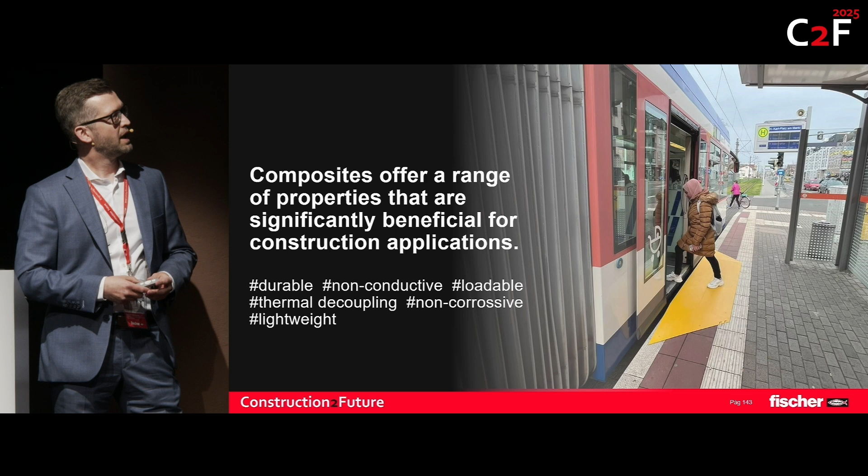Let's start with why. Why composites in the construction business? Composites offer a wide range of material properties that are quite useful for construction applications. All our products are developed combining a bunch of requirements. Material properties of composites are fitting quite well. When we look at this picture, for example, and I've just mentioned here a few properties of composites, we see this barrier-free ramp made of a vinyl ester glass fiber composite system, enabling wheelchair drivers or other persons with restricted mobility to enter and exit trains quite smoothly and comfortably.

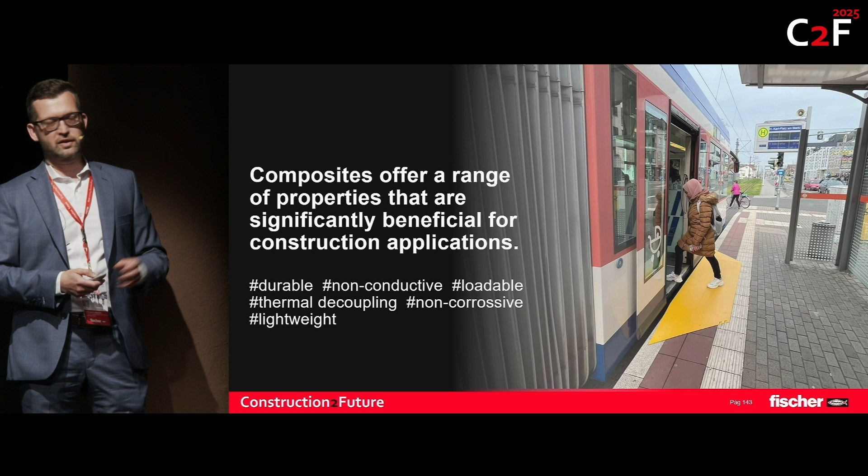Of course, thermal decoupling, for example, is another big advantage of composites compared to other materials in the construction business, like steel or aluminum, which we use for applications in the building envelope when it's about an energy-efficient way of building, which is not the case in this example. However, I would like to ask you to keep this picture in mind because I will return to it later on.

Let's continue with the question, what? What do we do in FISCO? As said, it's about profiles, and that's the typical process of our value chain, which almost every product goes through. We start with the idea, we bring it through the development process, we industrialize the product, we bring it to life, we materialize it, we have our own production, everything is located at one site in Germany, and we bring it to our customer, and of course we also support our customers with assembly support on the construction site.

But it's not about material only. The material is just a means to an end. And that's one crucial criterion with regards to the positioning of FISCO. We always think in systems and we think in solutions. So what does the customer benefit from? One example, you see it on the very right-hand side, the black frame. That's a window installation system which we have invented, also with some items that are patent pending at the moment. It's made of glass fiber profiles, but it's not about the profiles, it's about the solution. We save installation costs up to 75% in comparison to other similar solutions. So that's the way we provide a customer solution, and that's our understanding of an engineering accomplishment.

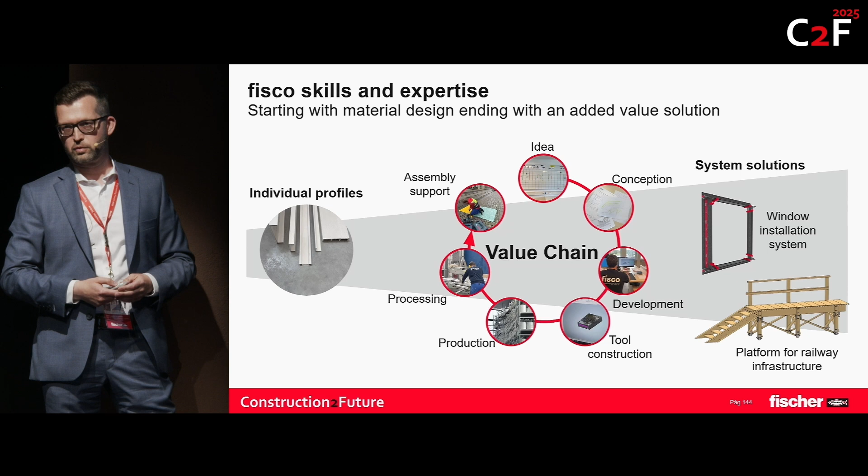Another example, and I will show this in detail later, is this platform for the railway infrastructure. So one part of the positioning of FISCO was solution orientation and a very strong application focus, being very close to the customer and being driven very technically. And then we dedicated ourselves to another very crucial issue of composites, because composites, also glass fiber reinforced polymers, GFRP, do inherently burn because they are made of a fiber component like glass fibers, carbon fibers, other fibers, and a resin, a matrix system, and this is organic chemistry.

So we said, why not develop an inorganic composite material? And we found out it's rather difficult. A lot of other companies tried to do so. Unfortunately, they failed. GFRP burns, ours does not. So finally, we succeeded in this development, and since this was a rather new material to the market, we decided to give it a name, and we call it FiResist, Fi for fibers, and the word fire resistant is inside this term. And I said to you, please keep in mind the picture I've shown you before to illustrate what composites in construction are good for.

So you see here, this is not on the outside, as shown on the picture before. That's inside a metro tunnel, the metro of the city of Munich. And there you have very strict fire requirements. No combustible, no flammable material is allowed to be installed in this tunnel. They even think about changing the timetables from a paper print to an incombustible version. That's how strict they are. And we also installed our access ramps for the wheelchair drivers here, because they are made of our incombustible composite material.

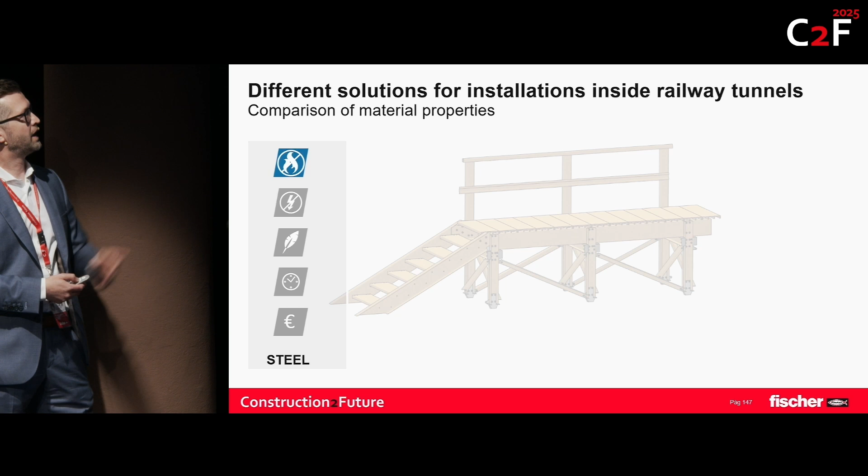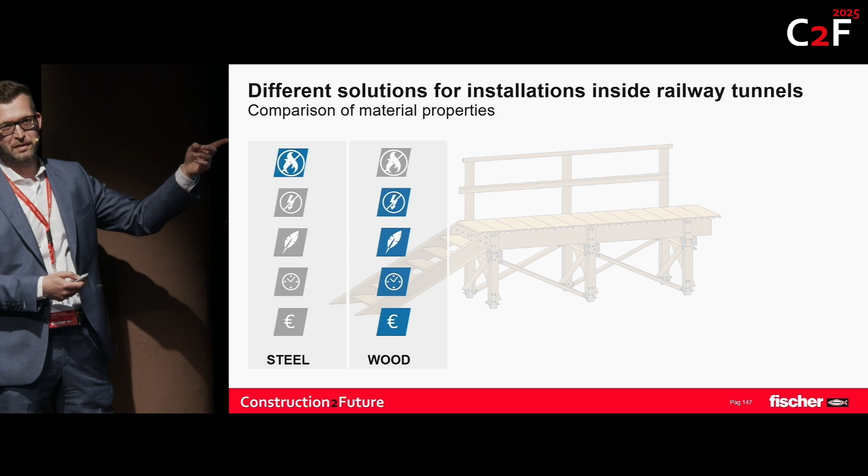And if we compare the typical materials used for such kind of installation with the criteria flammability, electrically non-conductive, lightweight, time for the installation, and in the end, what's the total cost of ownership? You see, steel, incombustible, but the other criteria are not fulfilled that well. With wood, as shown on the picture before, I think it was installed in the 1950s. Everything works out well, electrically non-conductive, easy to install, so it goes fast, and it's not too expensive, but unfortunately flammable.

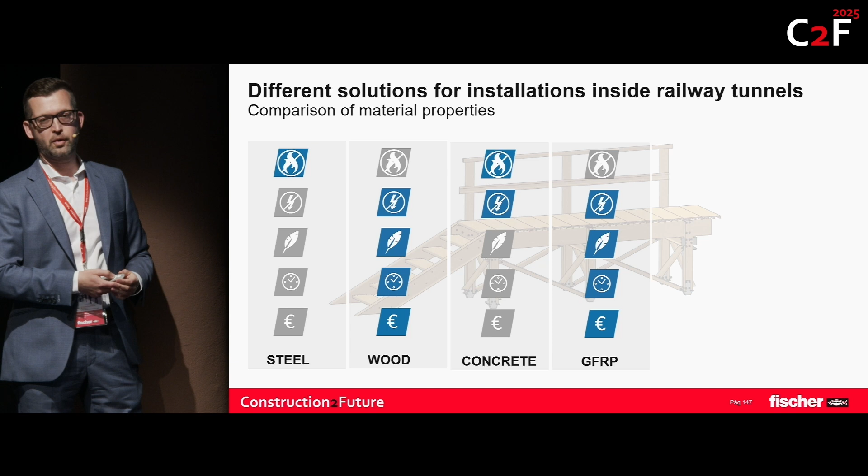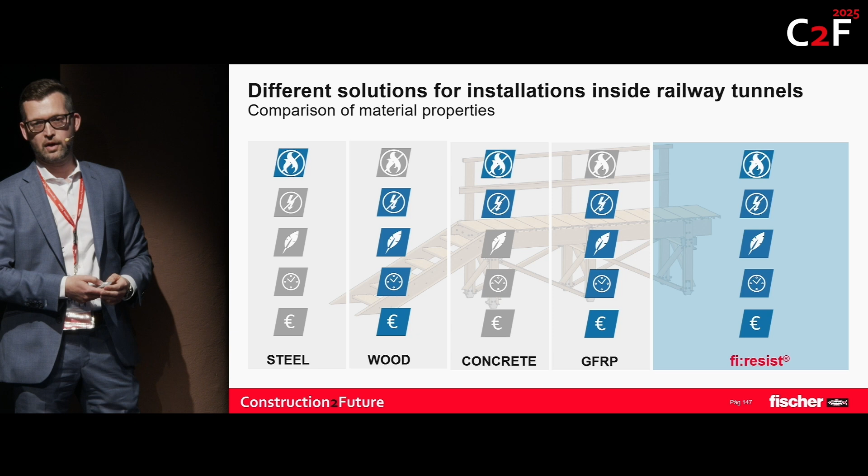Concrete, not flammable, electrically non-conductive, but definitely not lightweight. So it takes a long time to install, because you need to bring down all the material there, no matter whether it's concrete to be mixed on the construction site, or it's prefabricated concrete blocks. Takes a lot of time, needs heavy tools, heavy machinery, so rather expensive. With GFRP, quite a good solution, and that's why such kind of platforms you find outside of metro tunnels or railway tunnels quite often. GFRP works perfectly, but unfortunately they do burn, and with our material all these specific criteria are fulfilled.

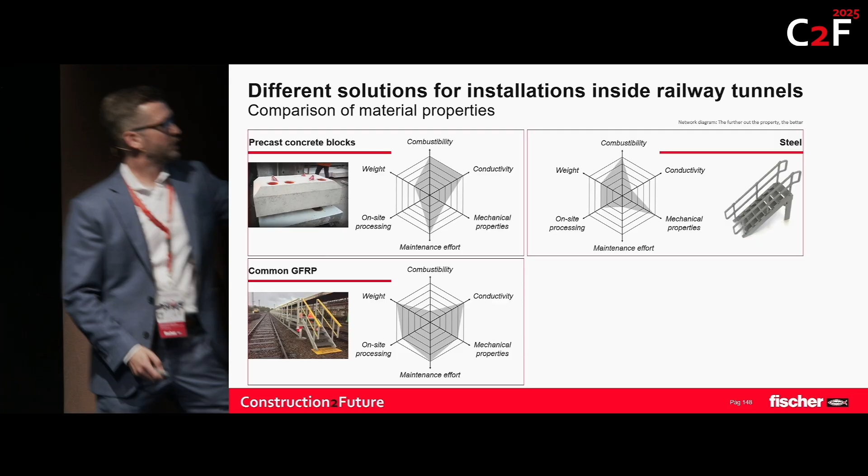Precast concrete blocks, as explained before, steel elements, common GFRP, and that's a platform on the outside, and that's quite common in the construction of railway infrastructure to have such GFRP platforms on the outside. You already see here, it's a rather completely filled out segment, so it's quite usable in terms of material properties, and with the fi:resist solution, we can meet these demands quite comprehensively.

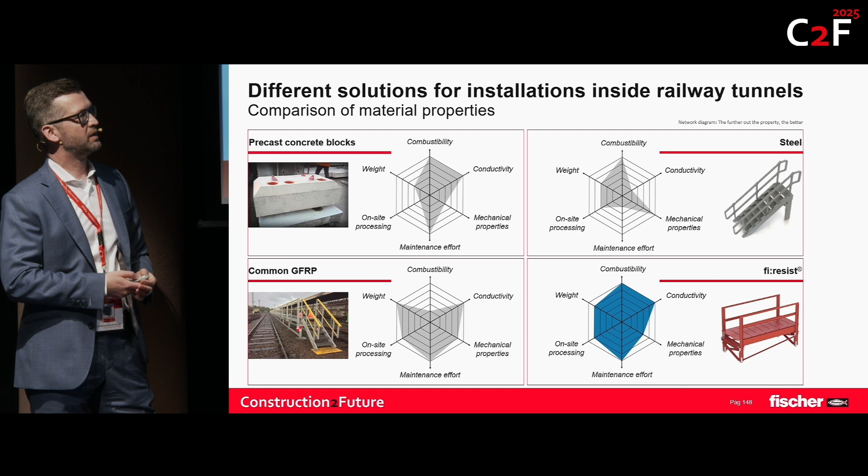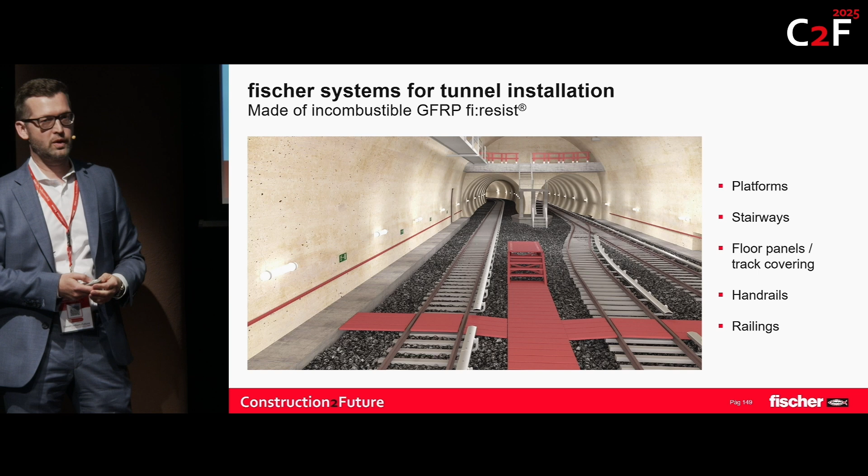And that's how the product program looks. We have the platform with staircases, we have walkway, we have handrails, and we have railing. That's a computer-generated image, and that's how it looks in real life. That was during the InnoTrans trade fair taking place in Berlin in September last year, and that was the world premiere of this entire program, which now also has, by beginning of March, received the approval from the Eisenbahnbundesamt, the German National Railway Authority.

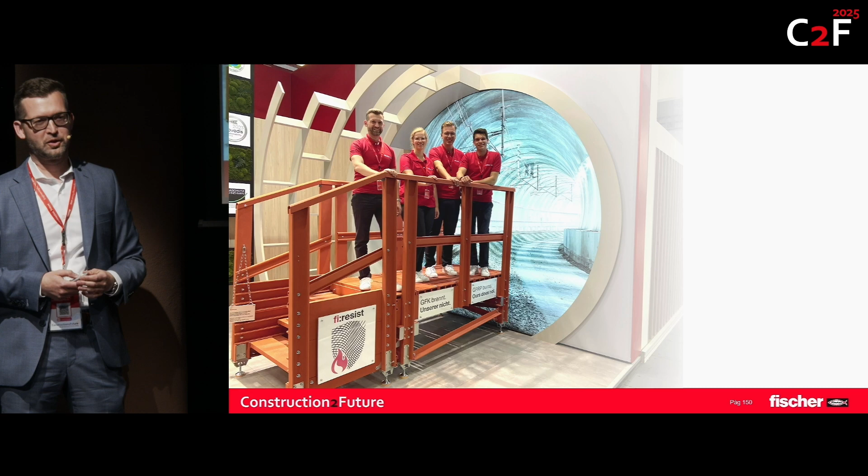We are about to obtain the European technical approval as well, so this process is currently ongoing, and I hope within this very short presentation I was able to ignite a certain spark to inspire you, not only in terms of railway infrastructure, but also with regards to other applications where you could think of composites in the construction industry and maybe also of incombustible composites.